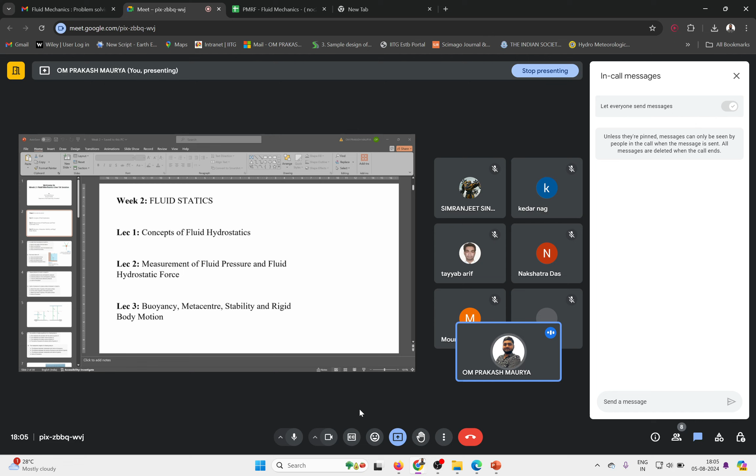So we'll start first with questions. Let me share the questions, since you all have completed lecture 1, lecture 2 and lecture 3. So let me share the questions. Question is visible, question number 1.

Anyone please try - yes, okay that's good. Now I will read the question and you will give your answer in the chat box, whether option A, B, C, or D is correct. First question is about the Archimedes principle, and here 'is' and 'are' matter.

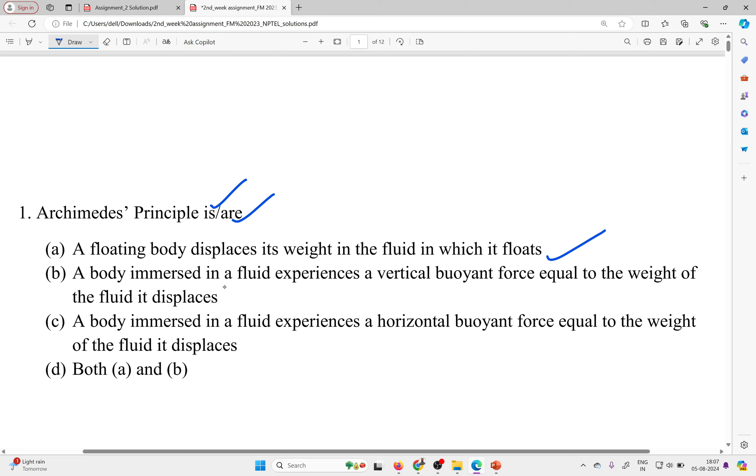Maybe one option is correct, or maybe more than one option is correct. Option A: a floating body displaces its weight in the fluid in which it floats. Option B: a body immersed in a fluid experiences a vertical buoyant force equal to the weight of fluid it displaces. Option C: a body immersed in fluid experiences a horizontal buoyant force equal to the weight of liquid it displaces. Option D: both A and B.

So which option is correct? Please comment in the comment box. So everyone is telling option B, okay. Please read the questions again, go through all options A, B, C, D once more - it might be possible that any of them is correct. Some people are telling option B, someone is telling option D.

Kedar Nag is telling option D. Nakshatra Das is telling option D. Aryan is telling option B, Simranjeet option B. Kedar Nag has changed the option, okay, no problem. Tayyab is telling option D. Okay, yes, D will be correct, because the Archimedes principle has two statements here.

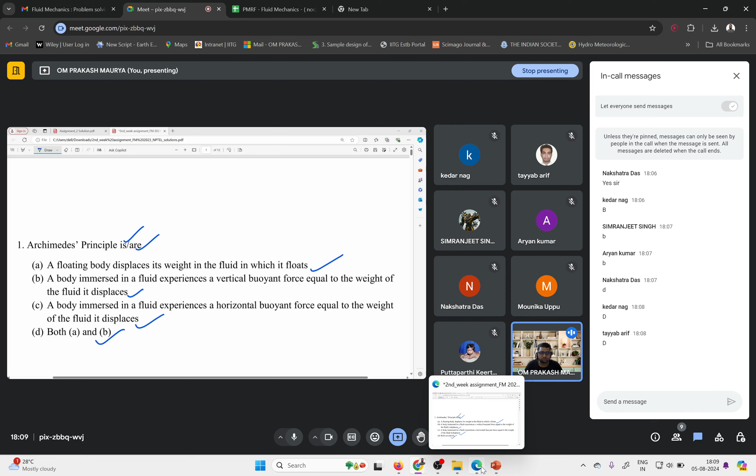First statement: a floating body displaces its weight in the fluid in which it floats. This is the first statement. Second statement: a body immersed in liquid. Let me draw some figure to show this.

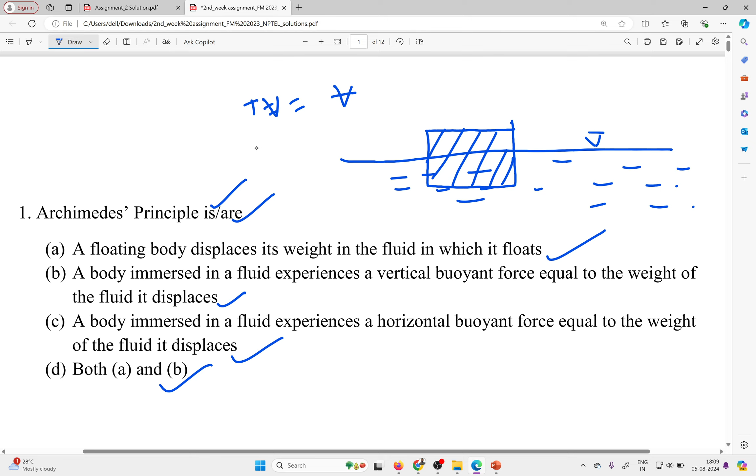What is it actually telling? If the water surface is like that, let us suppose this is water, and you put some block here. So the volume of this container is V, total volume is V. The immersed volume - let's suppose 60% of total V - and the rest is out of the water.

So the first principle is that whatever fluid is displaced by your body - if the body is immersed such that this much area is in the fluid, it will displace that much water from this place. This is the first one.

Second one is a body immersed in fluid. When you immerse a body in a fluid, what happens? A vertical buoyant force will act on the body - vertical, not horizontal. This side is not horizontal, it's vertical. This is the whole meaning.

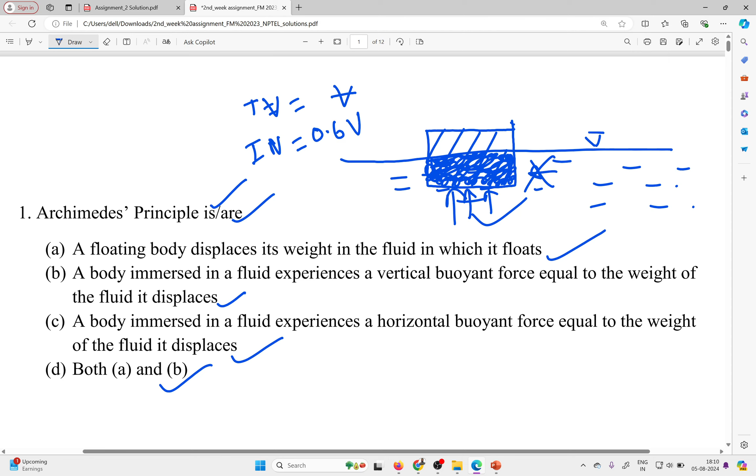Now moving ahead to the next question. Here some explanation is given, and it's very well written, so let me read it. These statements describe the Archimedes principle, named after the ancient Greek mathematician and physicist Archimedes.

First, what is the first option? A floating body displaces its own weight in the fluid in which it floats. This means that when an object floats in a liquid or fluid, the weight of fluid displaced by the submerged portion of the object equals the weight of the object itself. In other words, the upward buoyant force exerted on the object by the fluid equals the weight of the object, allowing it to remain in equilibrium and float.

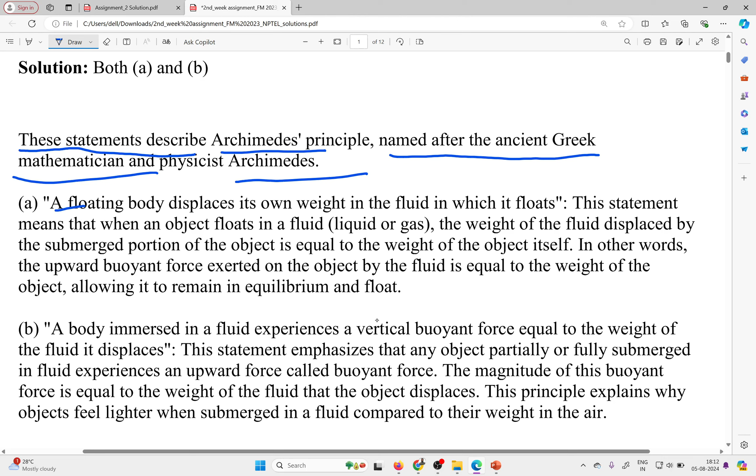So hope you people got what I wanted to tell. Now moving ahead to the next question. Next is question number 2: in the hydrostatic or shear-free case - why shear free? I will explain at the end - the pressure change in the horizontal and vertical directions should be filling the blanks, respectively.

So please try to fill in whether it will be zero, or depend on density, gravity, or change in depth. Please give your answer through comment for question number 2.

So we have also questions based on Archimedes principle. We'll solve that later. So first please try to give the answer of this question, question number 2.

Nakshatra is telling option D. Please everyone try to participate in the question answer session. Vishnu, okay, D. Simranjeet also D. Other participant, please also give your answer for question number 2. Vishnu is telling option D. Arya Kumar, okay, D option. Aryan Kumar, okay, D option. Everyone telling option D.

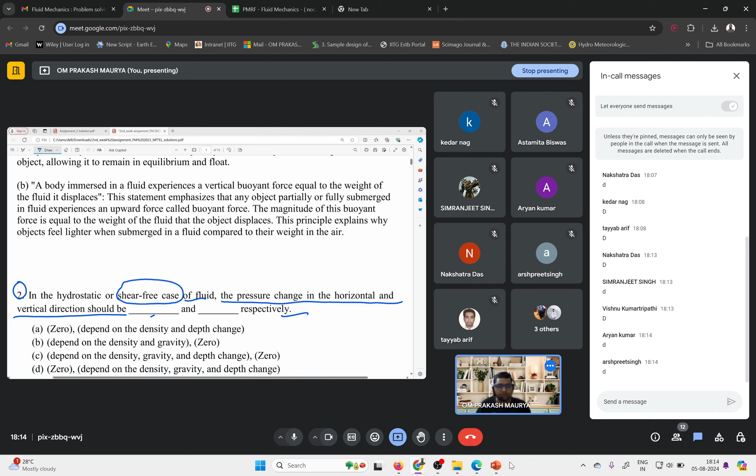Okay, definitely option D will be correct because it's a basic equation of hydrostatic. So let me show for other students how it will be correct. Hydrostatic or shear free means in fluid in the hydrostatic condition, that means your velocity is zero. If your velocity is zero, your shear force will be zero. That's why it is known as shear free case, hydrostatic condition.

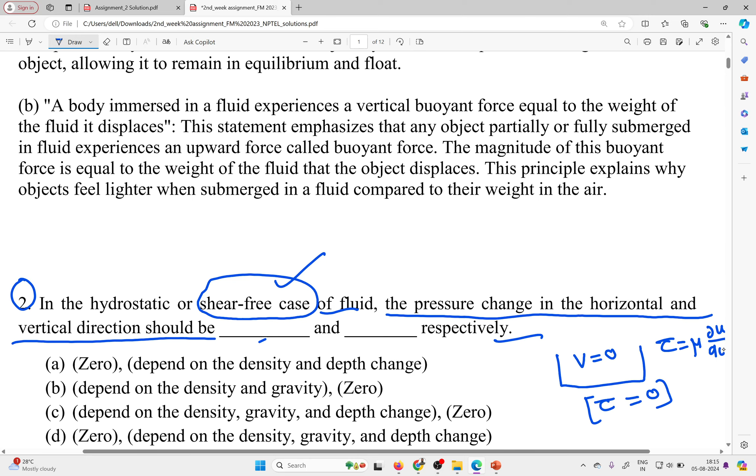So how it will be zero? Because your tau, or shear stress, is equal to dynamic viscosity. Dynamic viscosity will always be available in the fluid because it's a property of fluid. But the other thing, change in velocity with respect to depth - if your velocity is 0, then change in velocity will also be 0. Del u by del y will also be 0. So it means your shear will be 0. That's why it's a shear free case.

Now what is the actual question? The pressure change in the horizontal and vertical direction. In the horizontal direction, your pressure change will be 0 because as per Pascal's law, you already know, in the horizontal direction your pressure will be same, whatever your fluid is - there is no meaning. If pressure is P1, at the same line your pressure will be P2, your pressure here P3. So like that.

Now the other thing, the pressure change in horizontal and vertical direction. Your vertical direction equation will be pressure change delta P. Why it is happening like that? Delta P is equal to rho GH. So it depends on your density, acceleration due to gravity, and the depth change. Everything. So option D will be correct.

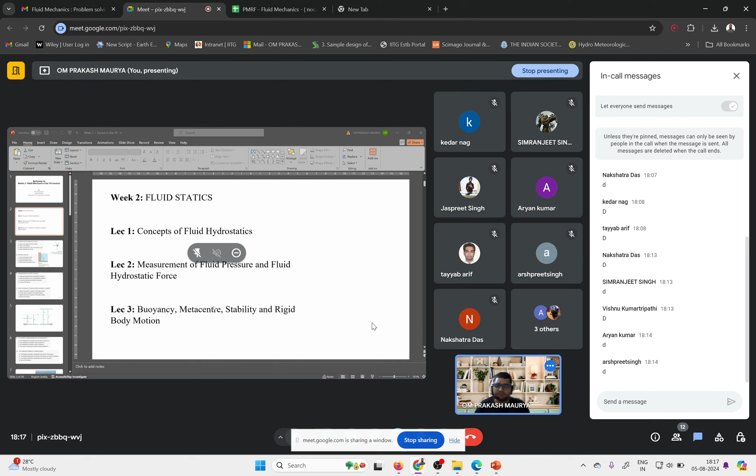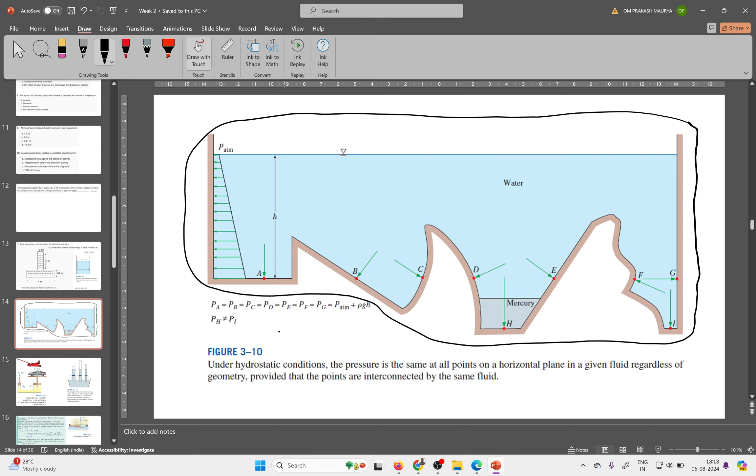Because it's very important, it is related to hydrostatic conditions. So hope the PPT is visible. What I actually want to explain, if you will see here, one figure is given. So here we are trying to measure the hydrostatic pressure at points A, B, C, D, E, F, G, H, or I.

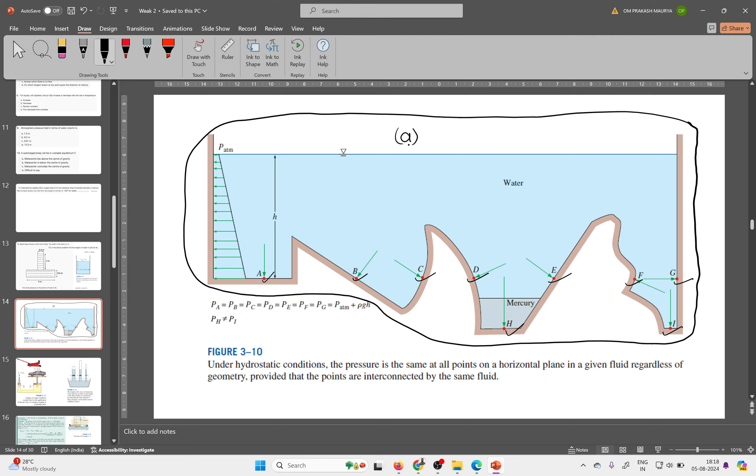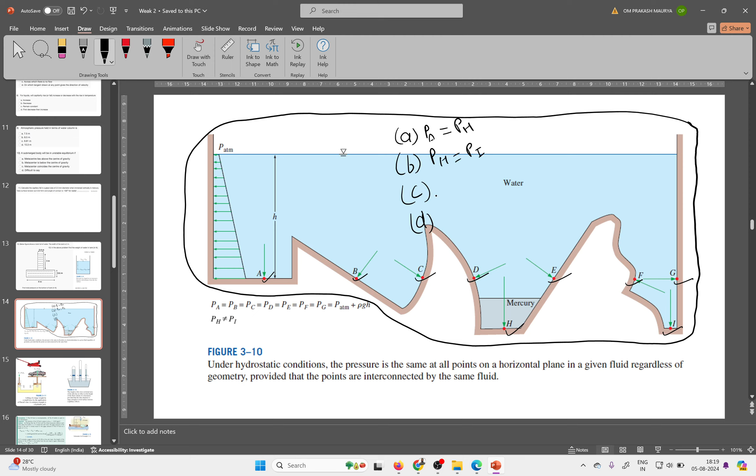So first I want to ask all of you, option A, option B, option C and option D. I want to put option A: pressure at D will be equal to pressure at H, pressure at H is equal to pressure at I, pressure at A equal to pressure at B equal to pressure at C. Option D: pressure at H is equal to pressure at D equal to pressure at E. So which option will be correct for this? Please use your reasoning. What is your thinking on that? And try to give an answer - whether which option will be correct for that.

For this question, okay, Nakshatra Das is telling option A, option C. Okay, other student? Other student please also participate in the question answer. Okay, Aryan is telling option B and C. Jaspreet is telling option C. Yes, it may be two options may be correct, or maybe all options correct. So please think, then give your answer. Sagar Kumar telling option C. Okay, good, other student please also give your answer. If you have joined here, please try to participate, then it will be more benefit for you. Other student, please also.

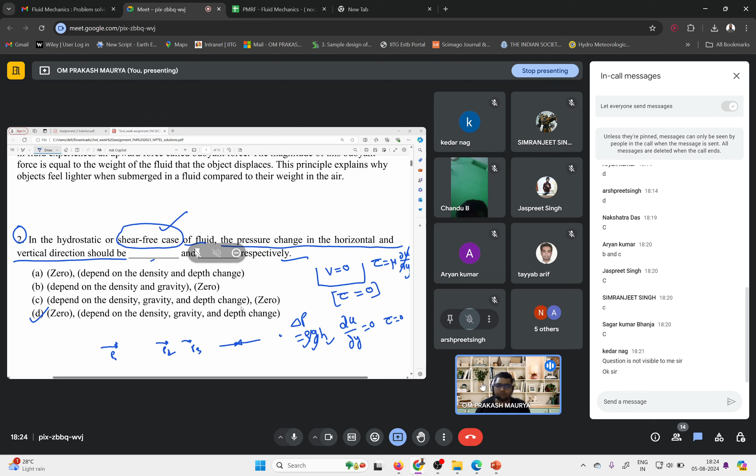Now moving ahead to the next question, question number 3. Question 3 is telling what actually? If you will see the explanation for that, the explanation I can also read.

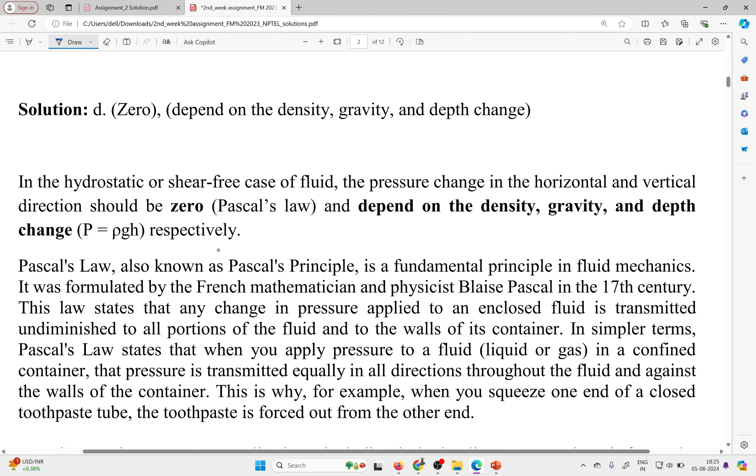In the hydrostatic or no shear or shear-free case of fluid, the pressure change in horizontal and vertical direction should be, by Pascal's law, depend on the density, gravity, and change in depth respectively. So for horizontal it will be 0, and for vertical it will depend on the depth and all.

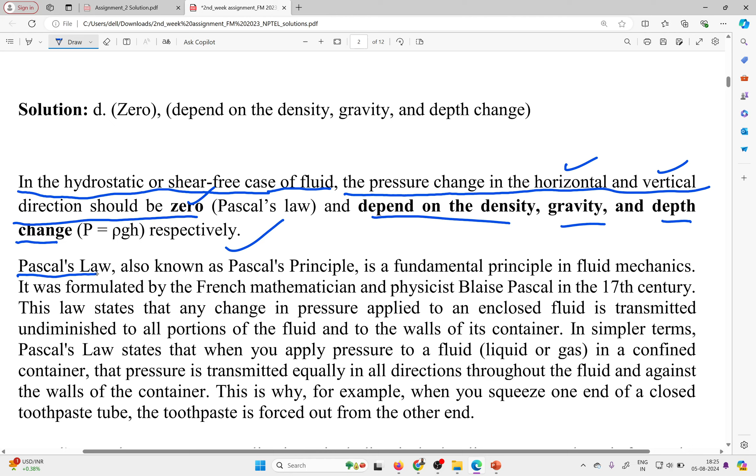So Pascal's law, also known as Pascal's principle, is a fundamental principle in fluid mechanics. It was formulated by the French mathematician and physicist Blaise Pascal in the 17th century. This law states that any change in pressure applied to an enclosed fluid is transmitted undiminished to all portions of the fluid and to the walls of its container.

Please remember, hope you are getting it. Let's suppose if water is here and it is closed, so if you make any disturbance here, it will be propagated throughout, here also, here also, everywhere on the wall also. So this is the meaning.

Pascal's law states that when you apply pressure to a fluid in a confined container, meaning closed from everywhere, the pressure is transmitted equally in all directions. Remember please, if your container is closed and you apply force here, your pressure is transmitted equally in each direction, throughout the fluid and against the wall of the container.

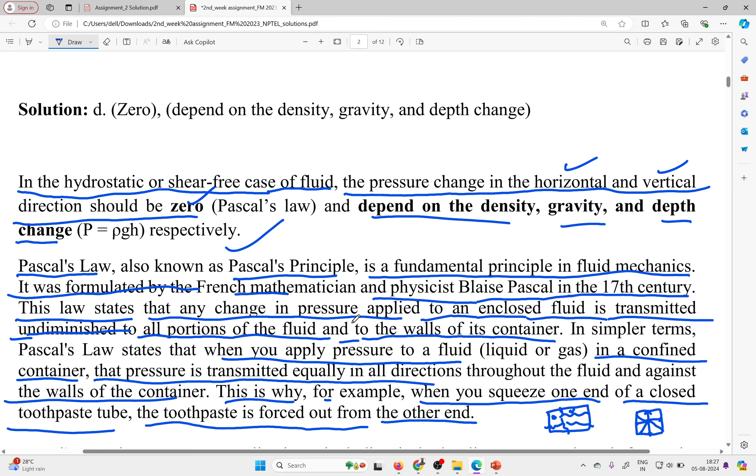This is why, for example, when you squeeze one end of a closed toothpaste tube, the toothpaste is forced out from the other end. So that's just an example, the toothpaste example here. So now moving ahead to the next question, lots of illustration is given, so we will not focus more. Here is question number 3.

Dawki Lake, a freshwater lake near Shillong in northeast India, has a maximum depth of 30 meters. Let's suppose a lake is here, this is the bed of the lake, and the maximum depth is 30 meters.

Okay, and the mean atmospheric pressure, so you can write here P atmospheric pressure, or average, you can write also. Average atmospheric pressure is 91 kilopascal.

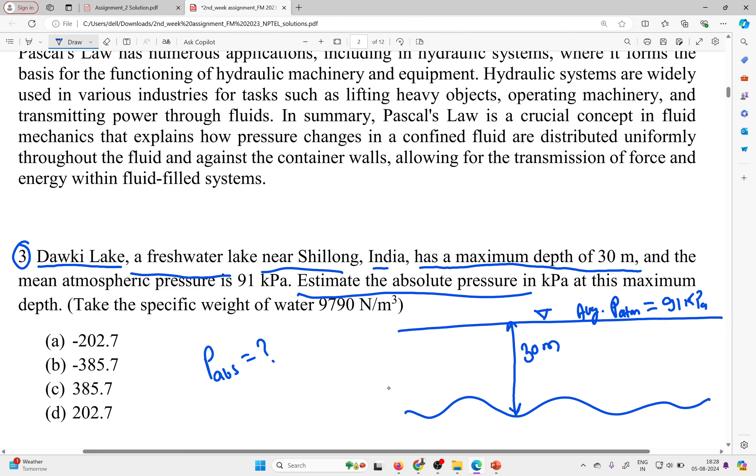Okay, estimate the absolute pressure. You need to calculate the absolute pressure for this question at the maximum depth, at this level you need to calculate P absolute.

So, and the specific weight of water is given, gamma W is given as 9790 Newton per meter cube. So all data is given, you please try to calculate whether the answer will be minus, plus, or whatever.

Please try to give your answer. Use your calculator, scientific calculator, or if anybody is a GATE aspirant, use your GATE calculator, online GATE calculator.

It will be more beneficial. Please everyone try to solve and give your answer. The question is very basic.

Nakshatra is telling the option. Which option? You are telling option C. Okay, someone telling option B. Okay, Nakshatra Das, okay, C. Okay, considered.

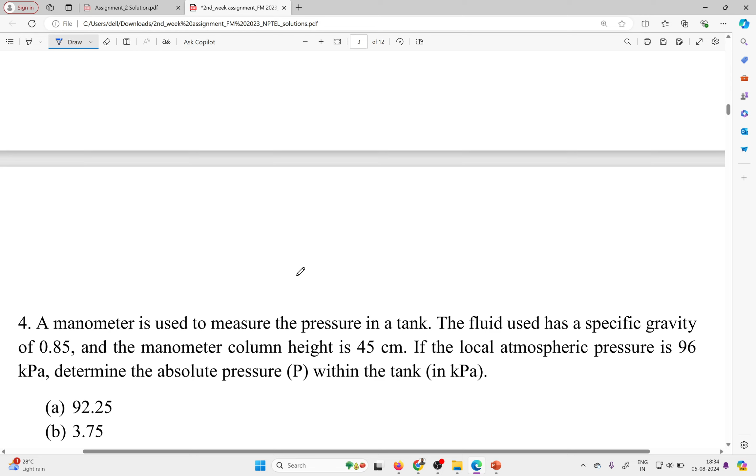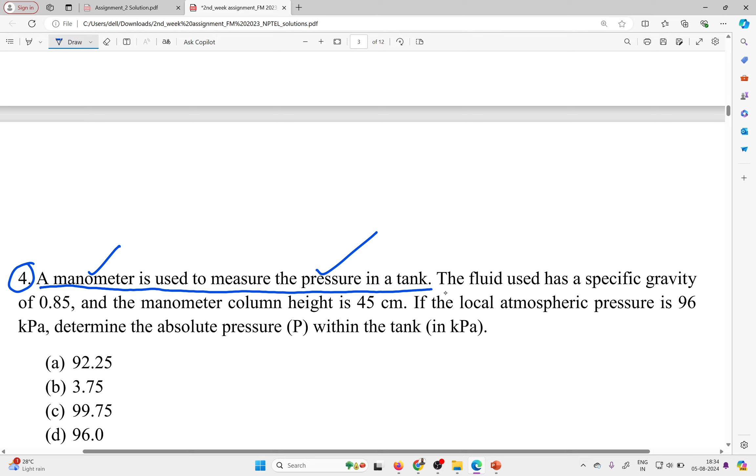Next question is about question number 4. A manometer is used to measure the pressure in a tank. Remember, sometimes the question asks what is the use of a manometer. A manometer is used for measuring the pressure in the tank. The fluid used has a specific gravity of 0.85.

Specific gravity of whatever the fluid is, 0.85. Okay, let's suppose a tank is there. In the tank, your manometer is used for measuring the pressure, so something like that. And the manometer column height is given as 45 centimeters.

If the local atmospheric pressure is 96 kilopascal, determine the absolute pressure within the tank. So you need to calculate first, please. Same approach you can follow: firstly understand the question, then take your attempt. As quickly as you solve, give your answer.

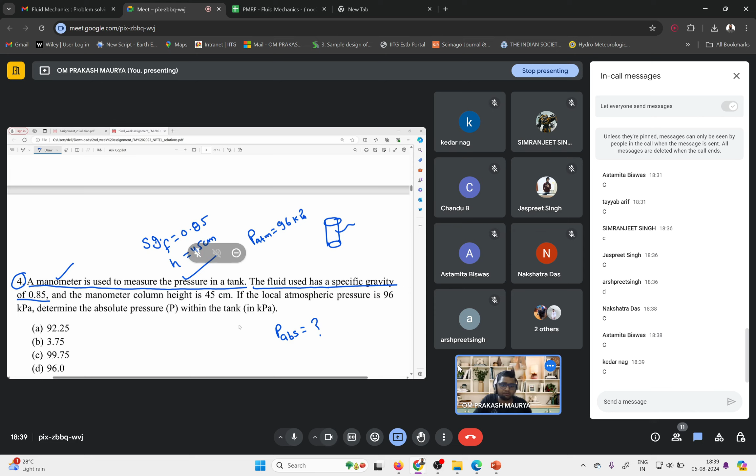Okay, Kedar Nag is telling option C. Okay, let me move on to the solution part. So here actually, in the question, P absolute means what? Already I have told you: it is P atmospheric plus whatever the pressure in the tank.

Here is the tank. In the previous question, your pressure was at the level of 30 meters. So here is the tank. Atmospheric pressure is given as 96. Definitely your absolute pressure will be greater than 96. So here, which option? Only option C. So definitely option C will be correct. But now, how will you calculate?

So P atmospheric 96 plus tank pressure. So rho is 0.85 into 1000, G is 9.81, and H is 0.45. Why 0.45? Because it's given in centimeters, so we'll convert to meters, then divide 45 by 100, so it will come to 0.45.

So 96 plus 0.85 into 1000 — oh, I have written 100, so here it will be 1000 — 1000 into 9.81 into 0.45. So it will be... okay, first we calculate this part only, then we'll add. So anywhere I'm doing a mistake, let me check.

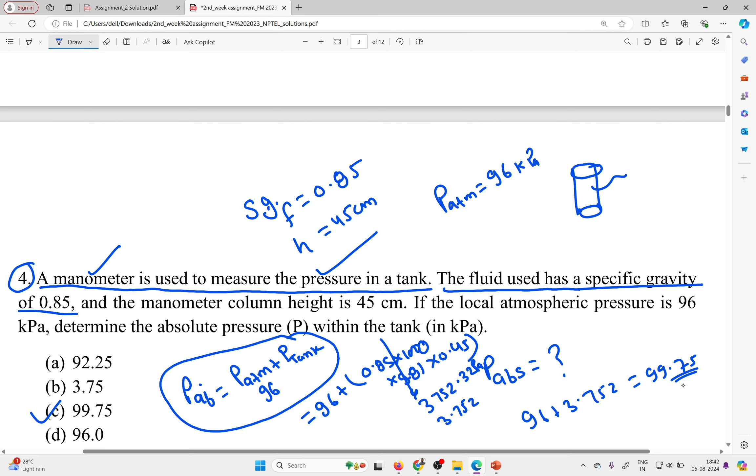So it is coming around 3, this part is coming 3752.32 Pascal, so in kilopascal 3.752. So 96 plus 3.752, it will come around 99.75, or if you will consider up to 2 digit kilopascal. So option C will be correct.

Simranjeet is telling maybe D. Jaspreet is telling option B. Okay.

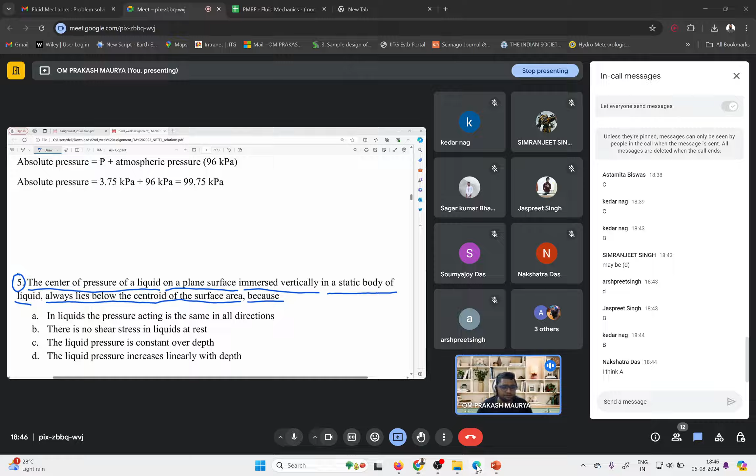This is a very basic question, so I think no one. Let me discuss. So actually what is the meaning? Question is asking, if it is a water body, you have placed one solid body immersed in the liquid or water, you can say. The center of your centroid of the body, if it is rectangular, would lie here. This is the centroid.

Centroid. But your center of pressure lies somewhere here below, this is the center of pressure. Center of pressure of what? Of liquid on the plane surface.

So why does this lie below? Because your pressure varies linearly from the free surface to the bottom surface, linearly. So it seems like that. So when you try to analyze the center of pressure or the center of this diagram, it will be from here to here. If it is triangular, h by 3, so it will always be below your center of, or the centroid, or center of gravity, you can also say, for a symmetric body.

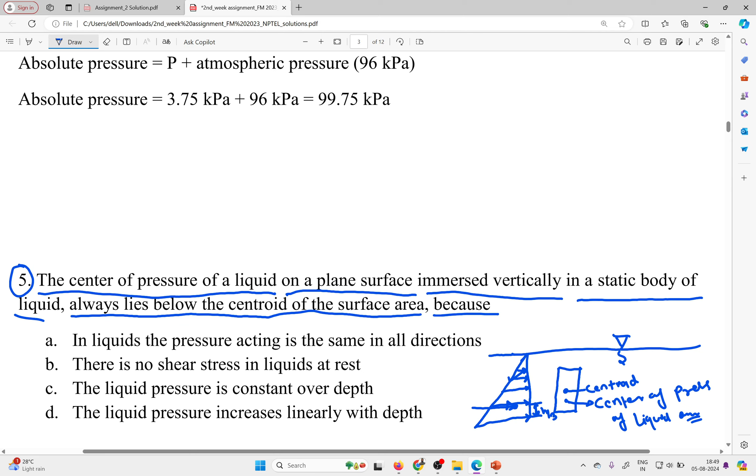So option D will be correct for question number 5. Hope everyone got it, what I wanted to tell. So now moving ahead with the next question.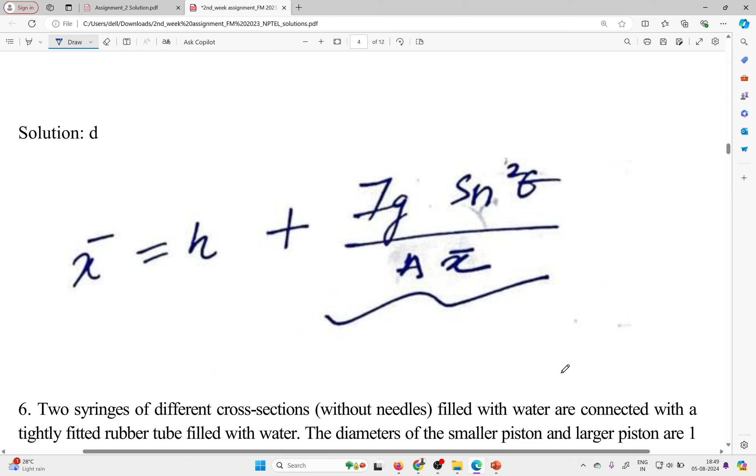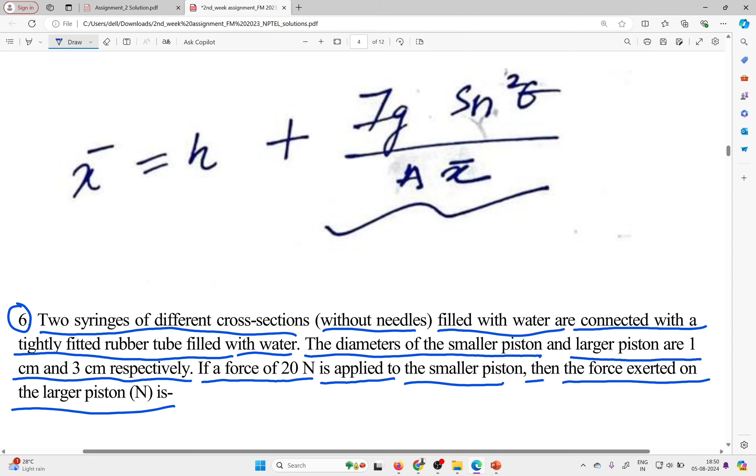Question 6 is about two syringes of different cross sections without needles, filled with water, connected with a tightly fitted rubber tube filled with water. The diameters of the smaller piston and larger piston are 1 centimeter and 3 centimeter respectively. If a force of 20 Newton is applied to the smaller piston, then what is the force exerted on the larger piston? Please see the options if you want.

Please just try to take an attempt and then I will move ahead. This is a basic question, basic understanding - if you have basic understanding...

Okay, option C. Here you can use Pascal's law. How you will use Pascal's law, I will explain. Other students may also try to take the attempt.

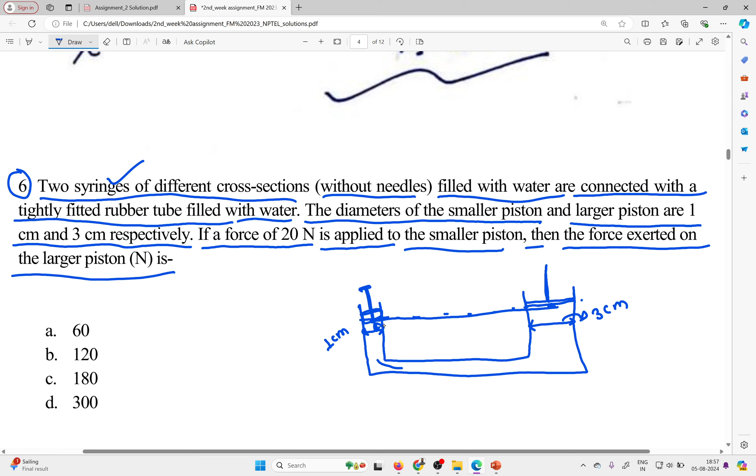So in the similar horizontal direction, because it is connected with the same liquid, what is the concept? At the same horizontal point, if this is point A and this is point B, pressure at A will be equal to pressure at B. This is a concept as per what? As per Pascal's law. Anyone want to tell something?

So as per Pascal's law, in the same horizontal direction, the pressure will be constant. So pressure at A is equal to force at A divided by area. Pressure at B is equal to force at B divided by area of B.

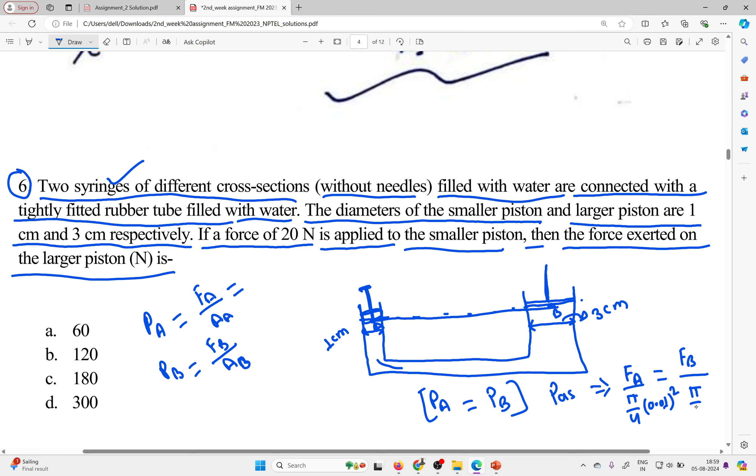So force at A divided by pi by 4 into 0.01 square equals force at B divided by pi by 4 into 0.03 square. Let me write here.

Force at A is given as 20. Area is pi by 4, and pi by 4 will cancel out. So 0.01 square equals, you need to calculate force at B, and your area here, you can write in the denominator part as 0.03 square. So force at B is how much? 0.03 square into 20 divided by 0.01 square.

Now you can calculate 0.03 square into 20 divided by 0.01 square. It will become 180, 180 Newton. So option C will be correct.

The understanding here is, if you make a system like that, applying just 20 Newton here, you are able to raise how much? 180 Newton. If I convert to kg, you divide by 10. So if you apply 2 kg weight here, you can easily lift 18 kg weight. So if you make a system like that, this is the overall understanding of this question.

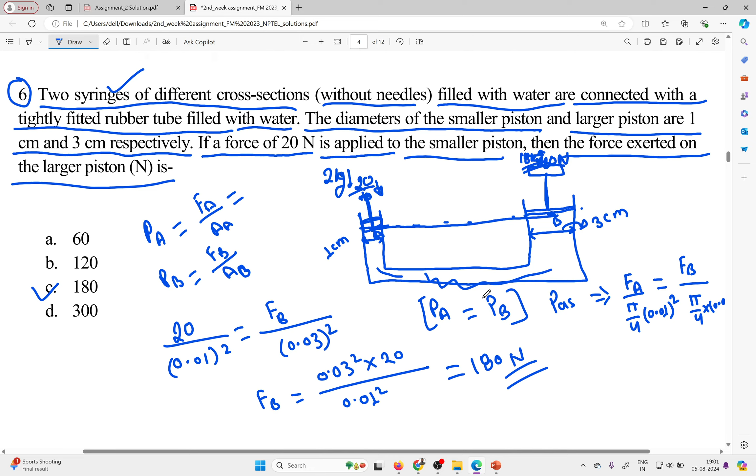So now moving ahead to the next question. The next question is very easy. Pascal's law states that the pressure at a point is equal in all directions. This condition is applicable for what? Laminar flow, fluid at rest, liquid at rest, or turbulent flow.

Maybe one or two options are also correct. So please try to give your answer, I am waiting.

Vamsi is telling option B. Nakshatra Das is telling C. Simranjeet B, Vamsi B. Kedar is also telling B. Jaspreet is telling B. Astamita Biswas is telling B. Arshpreet also B. Yes, everyone is telling B.

So definitely option B will be correct, because Pascal's law is given for fluid, not liquid, because fluid is a combination of both liquid and gas. So option B will be correct. Definitely, you are all right.

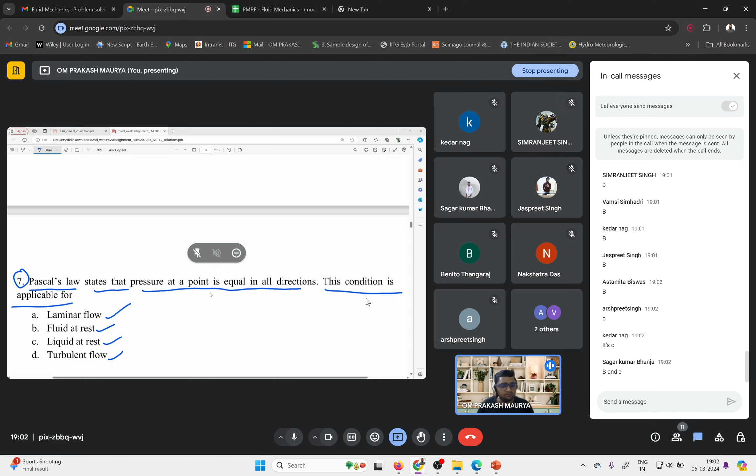So please read the question if anyone wants to read it. Anyone want to give the answer, please give it. Otherwise, I will take care of this question after 5 minutes.

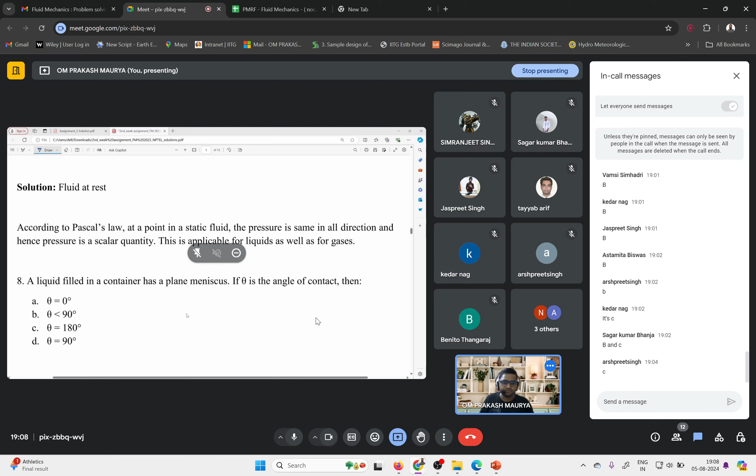Hello everyone. So question 8 is about a liquid filled in a container having a plane meniscus. The meniscus is plane if theta, the angle of contact, is 0 degrees, less than 90 degrees, equal to 180 degrees and equal to 90 degrees. So please think about that and try to give your answer in the comment box.

Most students are telling option B. Sagar is telling B, Nakshatra D, and Sagar again telling B. Vamsi telling D. Benito is telling A, Vamsi again telling D, and Sagar Kumar is telling B, and Arshpreet is telling A, B, C. You are thinking all options may be correct? Nakshatra Das is telling A. Any student want to comment? Kedar is telling A. Any more students? Simranjeet telling A.

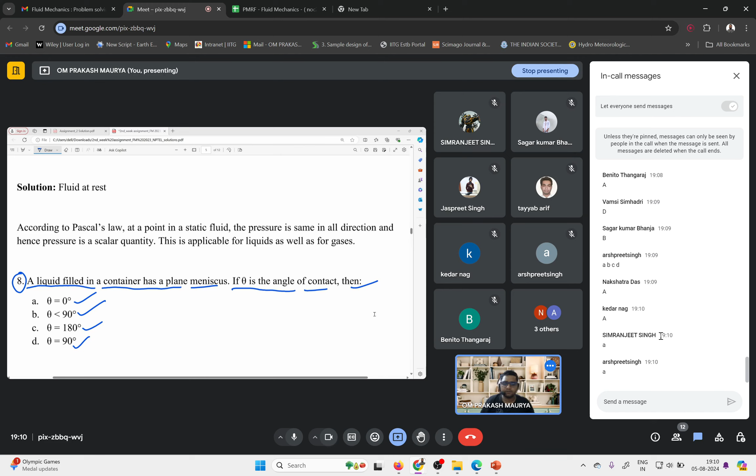Okay, so now I will explain. So here your plane meniscus means what? In a tube you have filled some liquid, and your liquid looks like that. This is the plane meniscus.

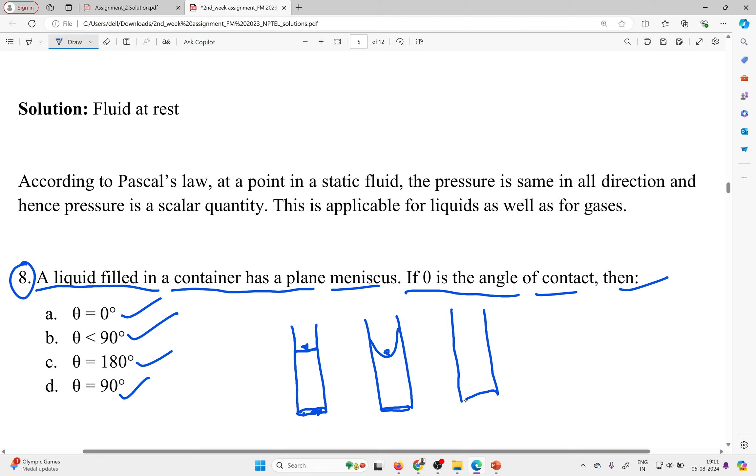Concave meniscus is like that, this is the tube. Concave meniscus is like that, this is the liquid, right? Convex meniscus is like that. So this is concave, convex, and this is plane.

Your theta is what? Theta is nothing but, if we draw a tangent here, the theta is this. If you draw a tangent here, your theta is this. Here if you draw a tangent, is it possible? Because it's plane meniscus, there is no angle here, it is not possible. So in this case your theta will be 0.

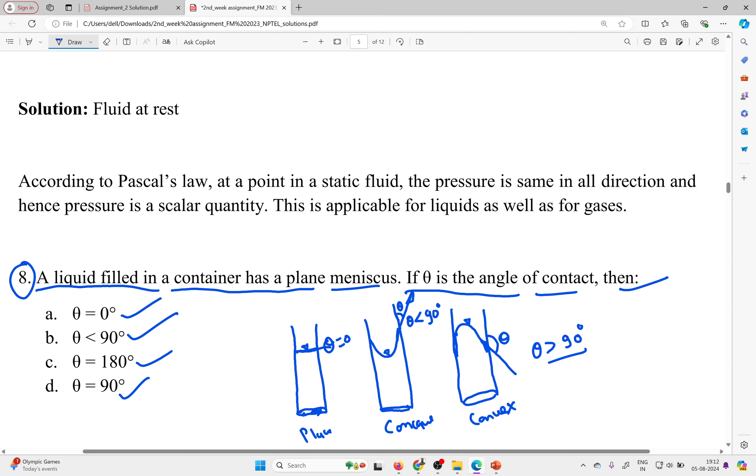In this case your theta will be less than 90 degrees. In this case theta will be greater than 90 degrees. So for this question your option A will be correct.

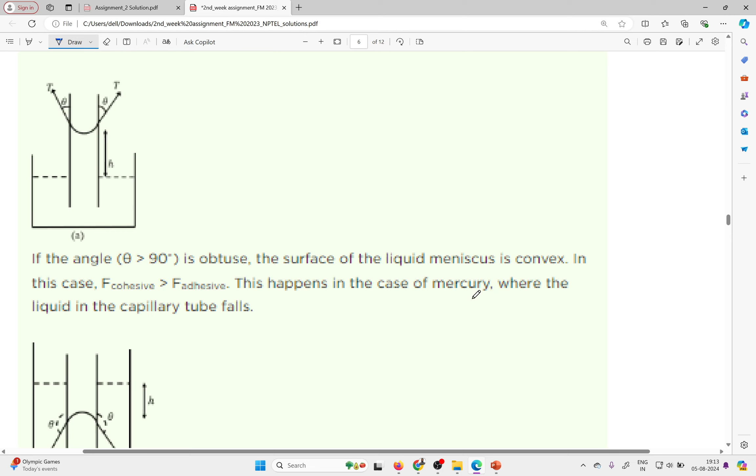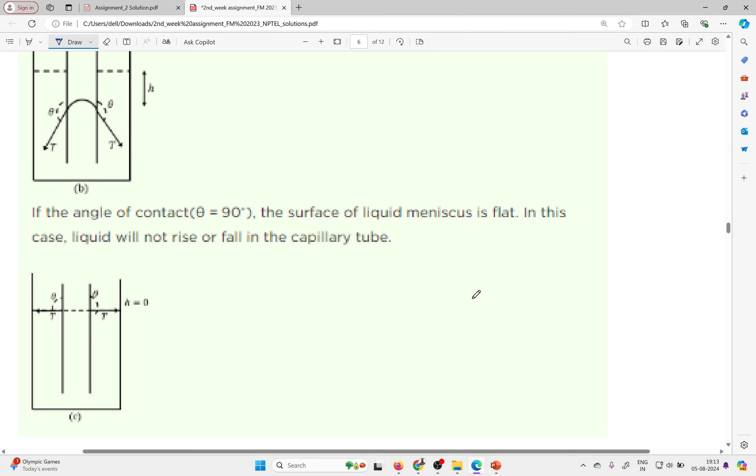So now the next question is question number 9. The atmospheric pressure head in terms of water column, whether it will be 760 mm, 101.3 kilopascal, 10.3 meter, or 10.3 mm. Atmospheric pressure head in terms of water column, question 9. So please everyone try to give the answer, and please everyone try to solve the question first, then try to give the answer.

Such type of question you can expect in your competitive exam. Currently lots of vacancies are there. RRB JE I think advertised lots of vacancy in civil engineering, and also GATE exam is coming.

Sagar Kumar is telling option B. Vamsi is telling option C. Nakshatra is telling B. A and B both correct. Kedar is telling option B. It might be possible A and B are correct, but I will discuss which option will be correct. Don't worry. So other students may also take attempt and also give your comment in the comment box.

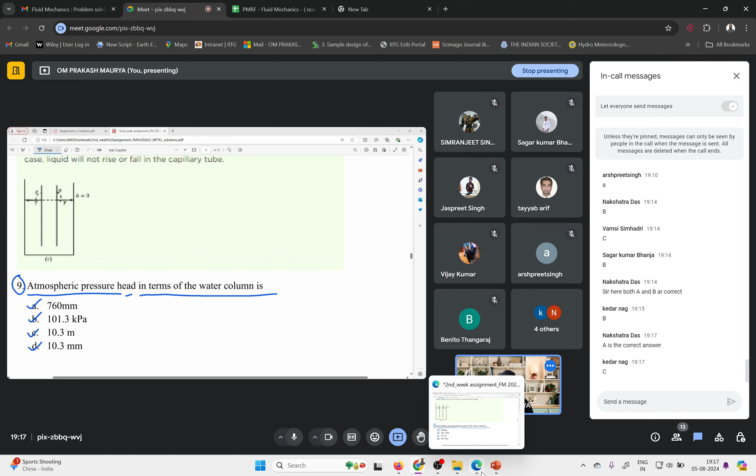Okay, now I want to explain. So here atmospheric pressure head in terms of water column. So how much is the atmospheric pressure? That is the average atmospheric pressure.

This is the average atmospheric pressure, or you can write it as 101.3 kilopascal average atmospheric pressure. But what,

like you have tried to write 760 mm of Hg. So similarly, your atmospheric pressure you try to write like something meter of H2O. Your atmospheric pressure was 760 mm of Hg. In terms of your mercury, in terms of water, how you will write? So in terms of water means what? So your pressure is equal to what?

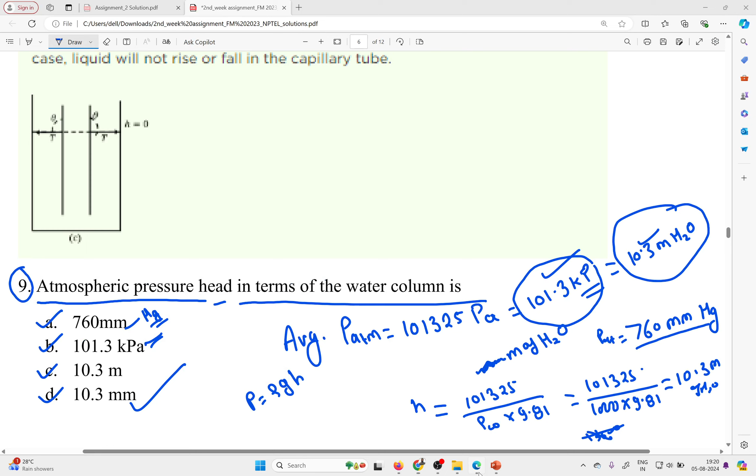So now moving ahead on the next question. Next question is about, okay, so this is a very important question. So question number 10.

While measuring the pressure, if we use an inclined tube manometer in place of a single column manometer, the sensitivity of the manometer is increased by a factor. So what is sensitivity? I will explain in this question. And how much, what is the factor of increase of sensitivity, I will explain.

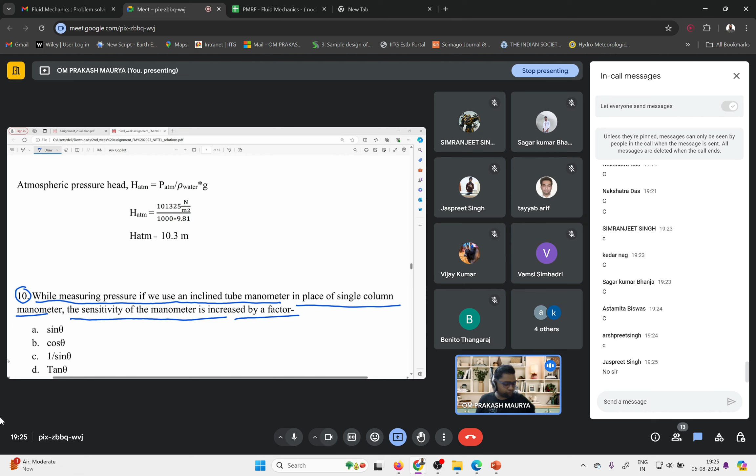So now I want to show you the answer. And what is actually sensitivity? Let me explain. So let us assume a manometer like that. Right, so in this liquid at the same level. So I want to increase something here. And the diameter of both sides is the same. Remember please, here diameter is D and here also diameter is D.

So when you decrease this height from this level to when you come up to that level, and you decrease h, here h distance will go up, h distance. So for this your sensitivity is how much? Sensitivity of h, sensitivity of this manometer is h. Sensitivity means what? If you are pressing or if you decrease h in the right column or left column, how much height is increasing in the left column? So here you are decreasing h, so here it's increasing h. So the sensitivity of this type of manometer is h.

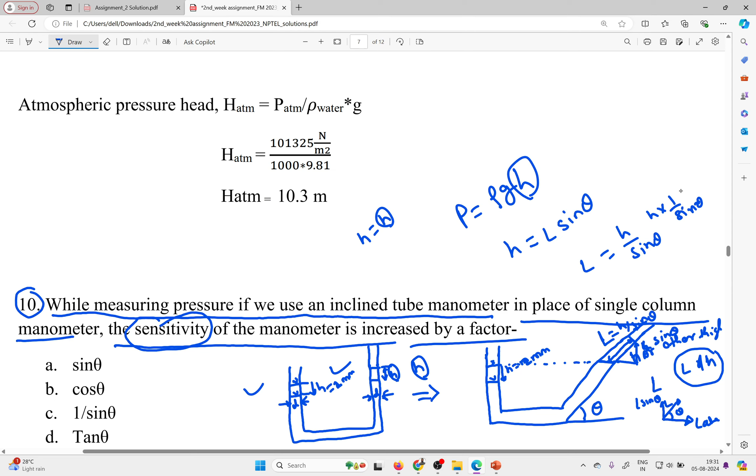So sensitivity increases. Initially the value was only H, but now H into 1 by sine theta. So it is increased by 1 by sine theta. Hope every student has got it, what is the concept behind this. So option C will be correct. Yes, everyone was correct.

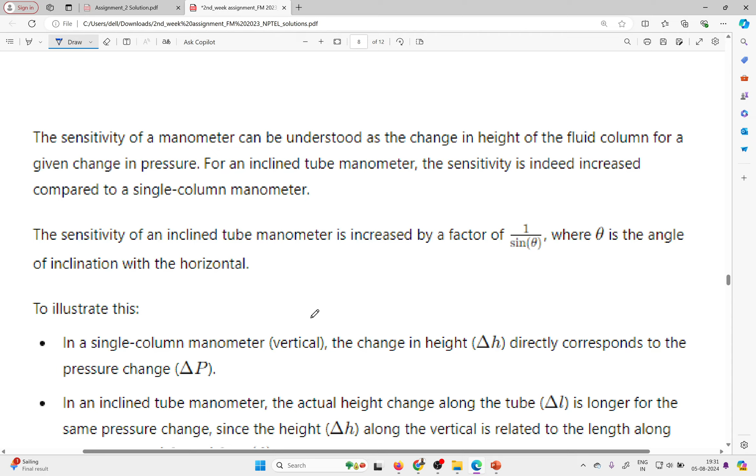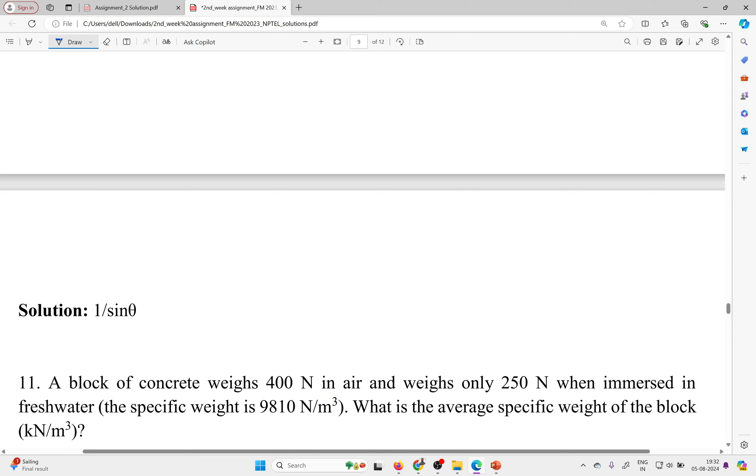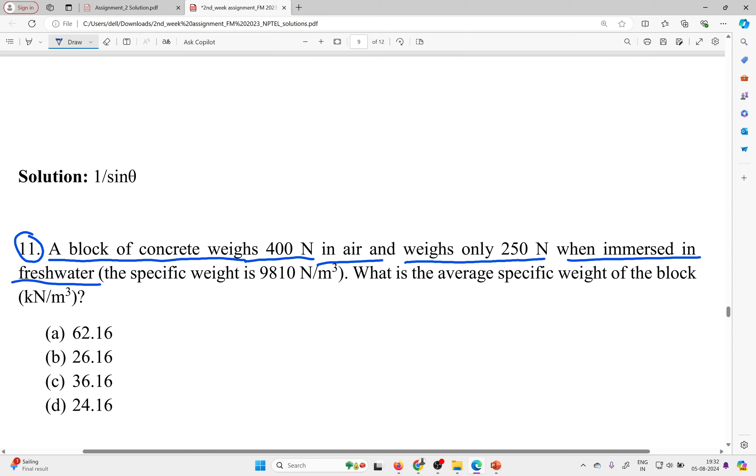Now this is a very interesting question, question number 11. A block of concrete weighs 400 Newton in air and weighs only 250 Newton when immersed in fresh water. Remember, in air if you weigh something it will be 400, after putting in water it is only 250 Newton. Where is the other force?

Here you will apply which principle? I will explain, first you try to take the attempt. The specific weight is 9810, specific weight of fresh water. What is the average specific weight of the block, in kilonewton per meter cube? Everyone please try to give the answer.

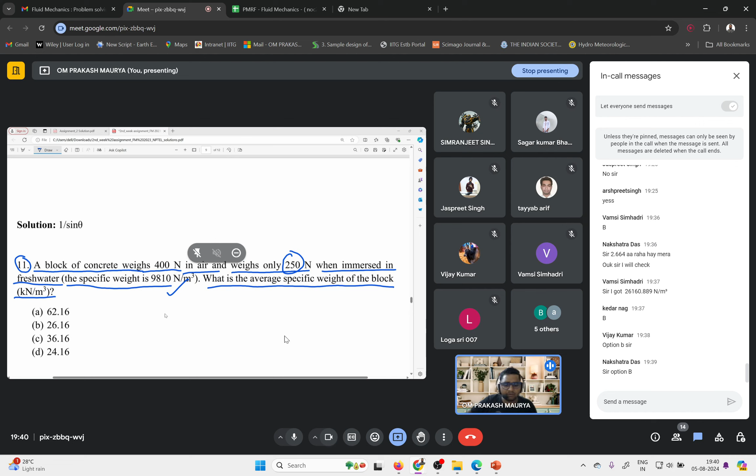Okay. Now I want to solve the question. Nakshatra Das is also telling option B. That's good, good attempt everyone. Now I will try to solve.

So here actually in air, let's suppose this is air. In air, one block is there. The weight is 400 Newton. In water, when you will put this block in water, weight is only 250 Newton. Where is the weight? Weight is balanced by the force of buoyancy or buoyant force.

So what is the average specific weight of the block? So here the question is, this is gamma B for block, gamma is showing specific weight. Specific weight is nothing but rho g - what is the density of block and the acceleration due to gravity.

So how you will write your concrete weight, that is weight, or gamma you can also write as weight by volume. So for gamma B, your weight in air is 400, and volume in air - because volume is not given, so you cannot do this attempt directly.

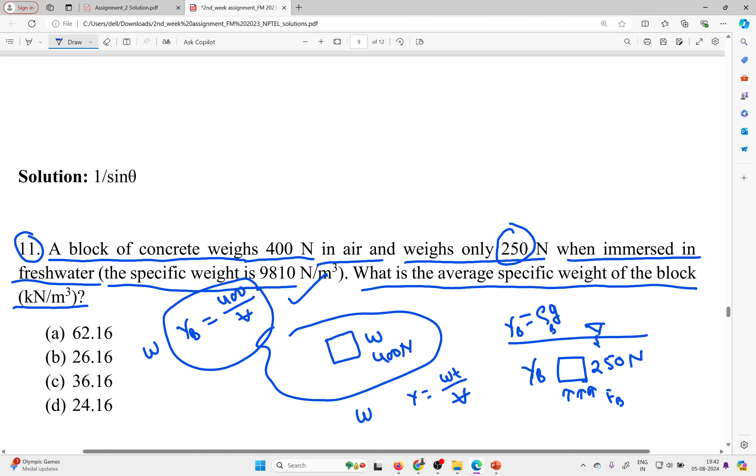So as per your Archimedes principle, how will you take this attempt? You already know the concrete weight or specific weight. So weight with this formula only - gamma into volume. So this is right only, gamma into volume.

So it is given your 400 Newton in air. But when you will immerse in water, what is the weight? When you immerse in water, it is coming around gamma B minus gamma W into volume is equal to 250 Newton. So then you can very easily calculate.

This is equation 1 and this is equation 2. This is gamma B and this is your volume, and this is volume. When you divide equation 1 by equation 2: gamma B minus gamma W is equal to, volume will be cancelled out, 400 divided by 250.

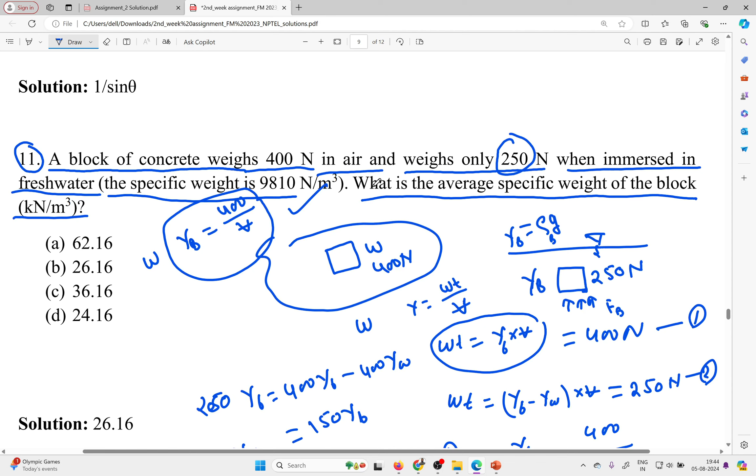Okay, that's everything is fine. And this is gamma B. When you calculate, it will come around 26.16. So like that you can very easily calculate.

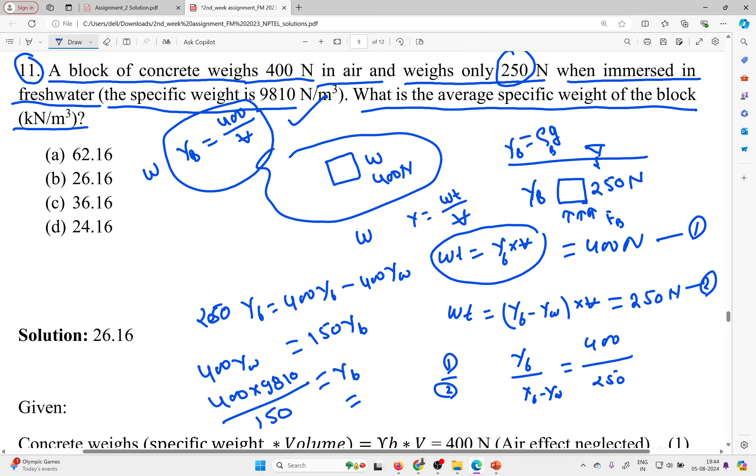So here the concept is nothing but: the formula of specific weight is equal to weight divided by volume. Another concept is, when you put it in water, your gamma is changed - it reduces by gamma W. So initially gamma 1 is like that in air, gamma 2 is like that, gamma minus gamma W.

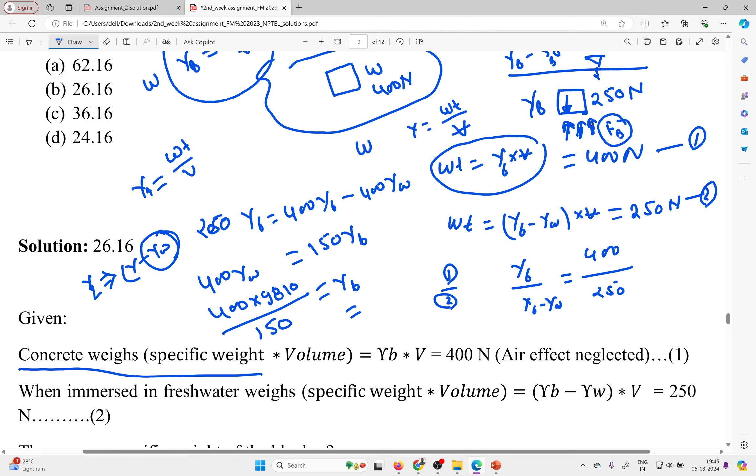So how does this gamma W come into the picture? This comes into the picture for the buoyant force, because - and why is it minus? Because this is downward, and the force due to buoyancy, it will be in the upward direction. So definitely if you are taking downward as positive, then the upward thing will be negative. So I hope everyone got it.

Now moving ahead with the next question, question number 12. A vertical rectangular gate, 2-meter wide and 2.5-meter height, is subjected to water pressure on one side. The water surface being at the top of the gate. The gate is hinged at the bottom and is held by a horizontal chain at the top. It is held by a horizontal chain, please remember.

Calculate the tension in the chain in kilonewton. Which option will be correct? A, B, C, D. Please, this is a very basic question, or a little bit conceptual. Here your strength of material concept will also be used. Mechanics, solid mechanics concept will be used here also. So please try to take the attempt, then I will explain the answer. You have 5 minutes for that.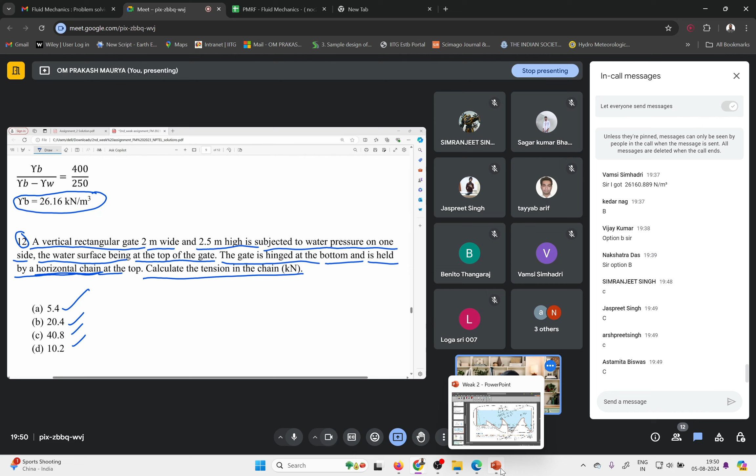Okay, now I will explain. So here is a very basic thing. If you read the question carefully, you can imagine one thing: a gate is there. I am showing you only the side view, and a horizontal chain is like that. One hinge is here, right?

So calculate the tension in the chain, and your water is in this direction only. So your pressure distribution will be like that, definitely. Wide is the gate width, how much? Gate width is given like that, it is 2 meter. And throughout, the water is there.

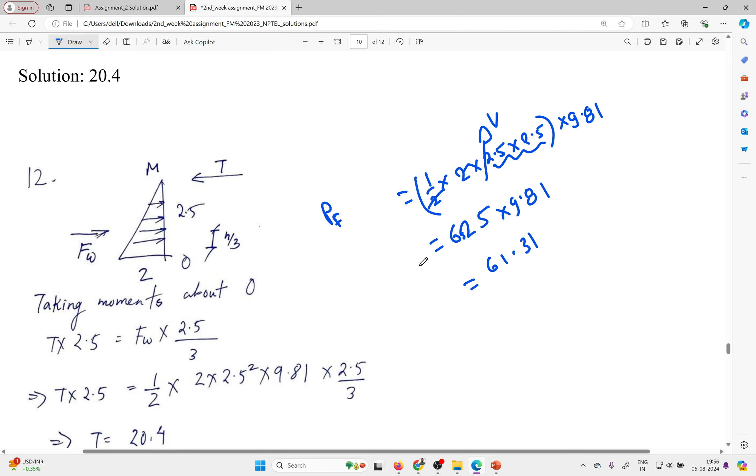20.43, so your correct answer is B. So remember please how you will take the attempt for this question. So now moving ahead with a new question, another question, question number 13.

A 15 centimeter length of steel rod with a relative density of 7.4 is submerged in a two-layer liquid. Two-layer liquid, remember please, layer of liquid is 2. Here is the layer. The bottom layer is mercury and the top layer is water. The depth of bottom surface of the rod from the liquid interface in centimeter - what you need to calculate? The depth of bottom surface of the rod in centimeter you need to calculate.

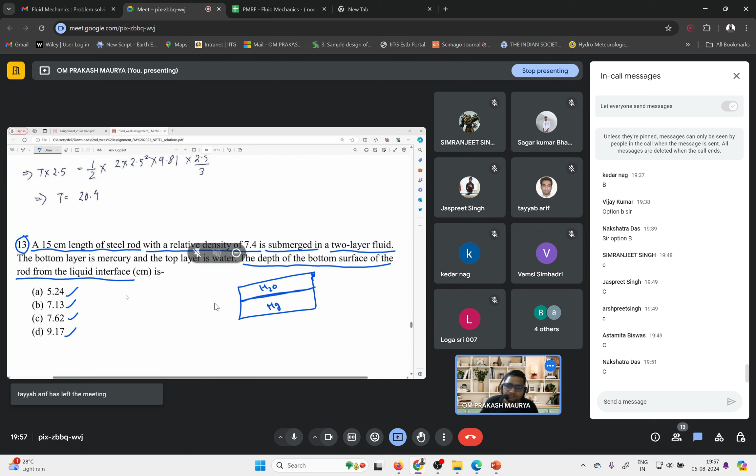So the relative density given here is 7.4. Relative density is nothing but it is given as 7.4. Okay, I will explain, please first you try to take the attempt. Within 2 minutes if you want to give answer, anyone please give, otherwise I will show.

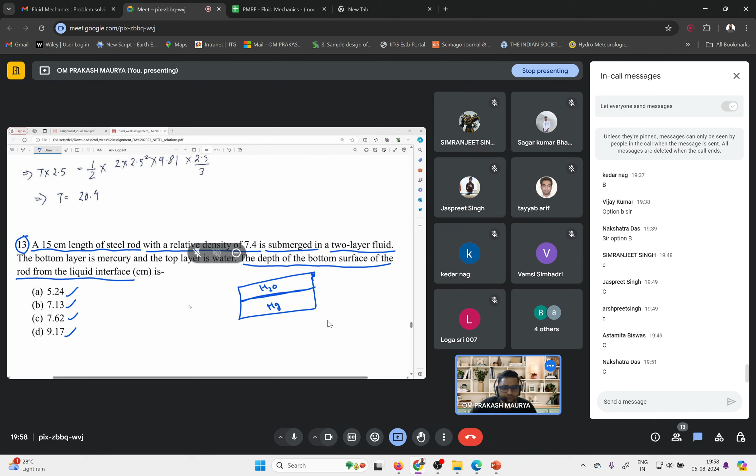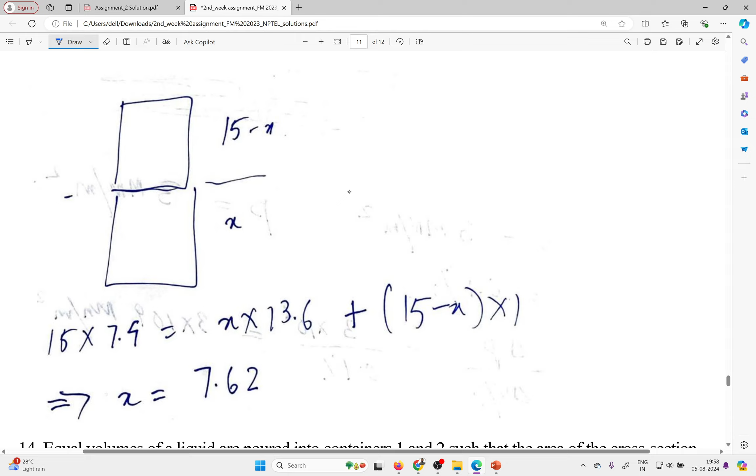Okay, we have very limited time, so I want to show you the answer first, because how you will take the attempt. So you know, as per Archimedes principle, first of all, in the question it is already given the length is 15 centimeter, and density is this, relative density.

So 15 centimeter into relative density 7.4 is equal to what? How much immersed in water? That is, let us suppose immersed in mercury is X, and immersed in water is 15 minus x. Rest will be immersed, so X into relative density of mercury.

13.6 plus 15 minus X relative density of water. So now you can calculate very easily. So when you will calculate, your answer will come out 7.62.

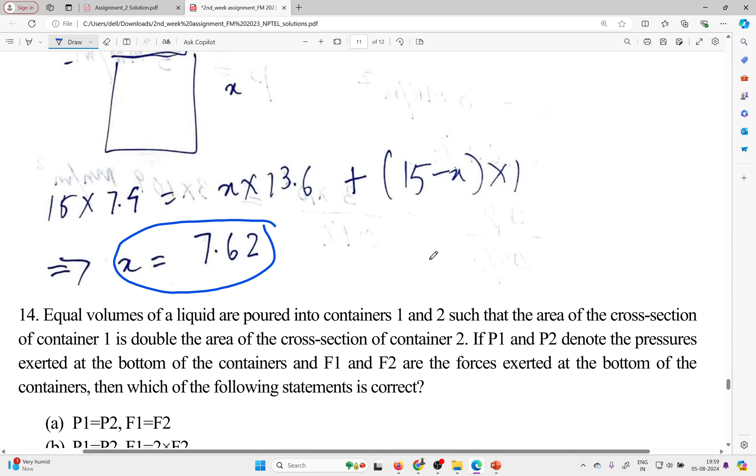So the next question is very easy. Equal volumes of liquid are poured into two containers. Let's suppose container 1 and container 2. The area of cross section of container 1 is double the area of cross section of container 2. So here is 2A and here is A. Definitely, when you put the same volume for the same volume, height will be more. If you put volume V here and volume V there, the area is less in the second case, so the height will be more compared to the first one. So this is the concept.

If P1 and P2 denote the pressure exerted at the bottom of the container, and F1, F2 are the forces exerted at the bottom of the container, then which of the following will be correct? So P1, P2, F1, F2. Right, so what is the concept here? Actually, your pressure depends on force by area.

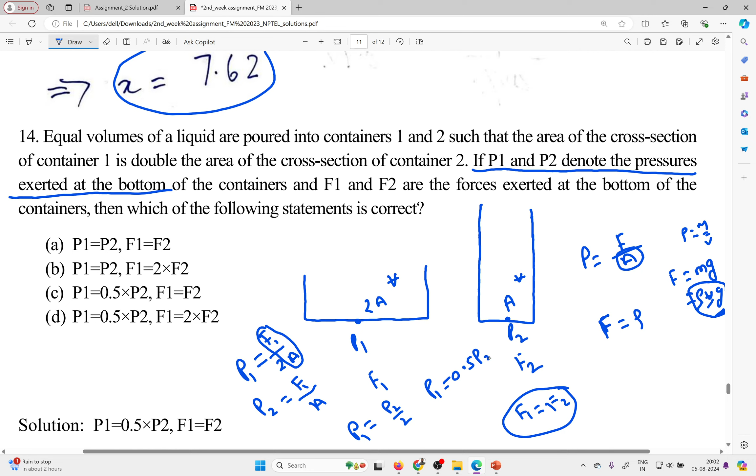But what about the pressure? Pressure depends on area. So P1 is equal to force F1 divided by 2A, and your P2 is equal to F2 by A, or since F1 equals F2, you can write F1 divided by A. So P1 is equal to F1 by A, which is P2, divided by 2. So P1 is equal to 0.5 P2. Hope everyone got it, what I want to say.

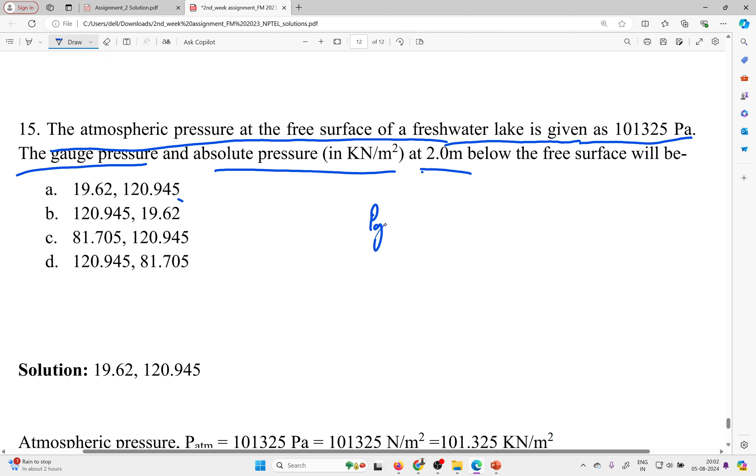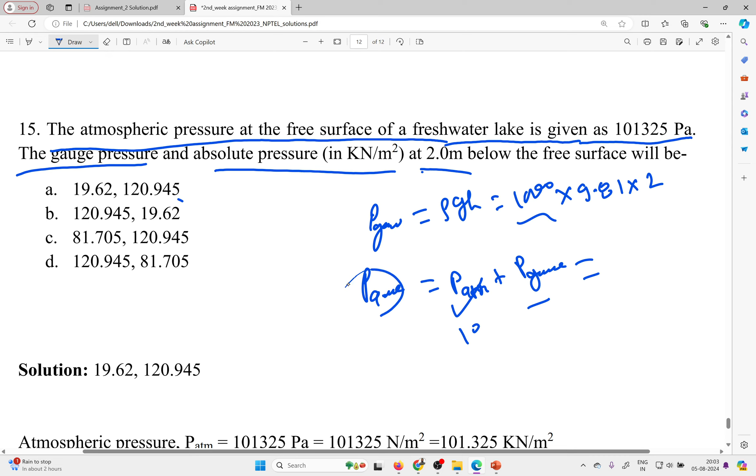Now the last question is very easy. The atmospheric pressure at the free surface of the freshwater lake is given as this much. The gauge pressure and the absolute pressure at the depth, this is very easy. So your gauge pressure, how much? Pressure gauge and pressure absolute at the depth of 2 meter. So P atmospheric pressure plus P gauge. So P gauge, how do we calculate? Rho g h. Rho is 1000 into g 9.81 into 2, and atmospheric pressure is already given, and you add this data, so you get P absolute, and here is P gauge. So you can easily get it. So this is the whole calculation.

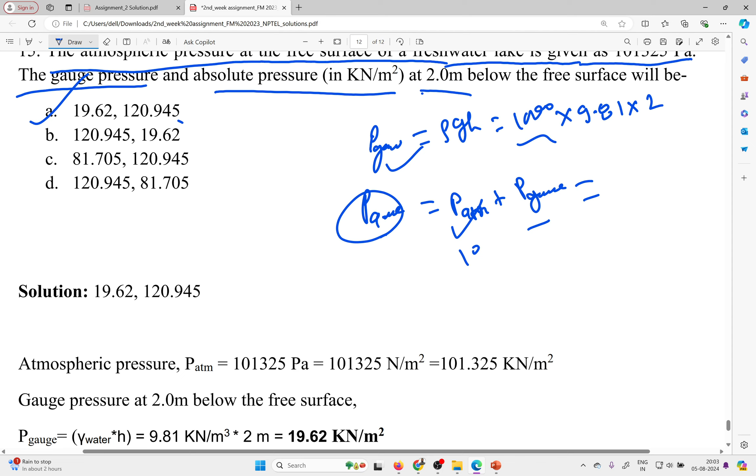So your option will be correct, 19.62. Option A will be correct for that. Hope everyone got it, what I tried to say in this question.